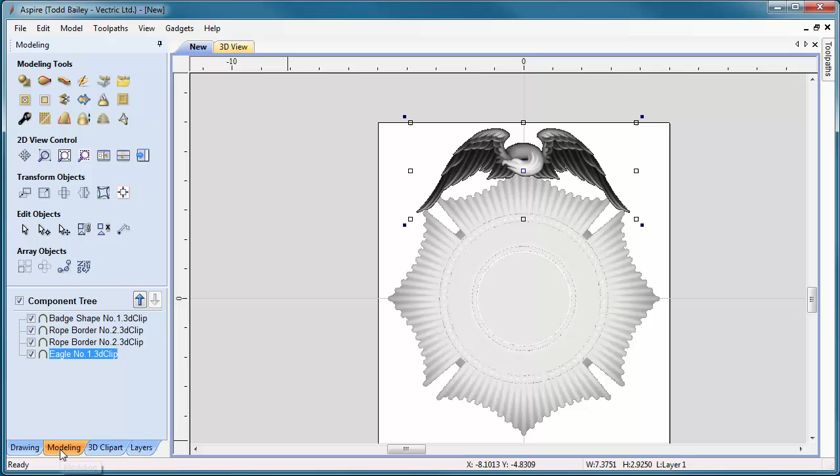So we're going to grab the badge and the eagle, and we're going to go ahead and make sure they're centered. Oh, they are, perfect. And that's great, so that's the layout, essentially.

Pretty quick, eh? But now what we're going to do is select everything and press F9, and then we're going to flip to the 3D view. Now we need to make sure that everything is being taken care of correctly.

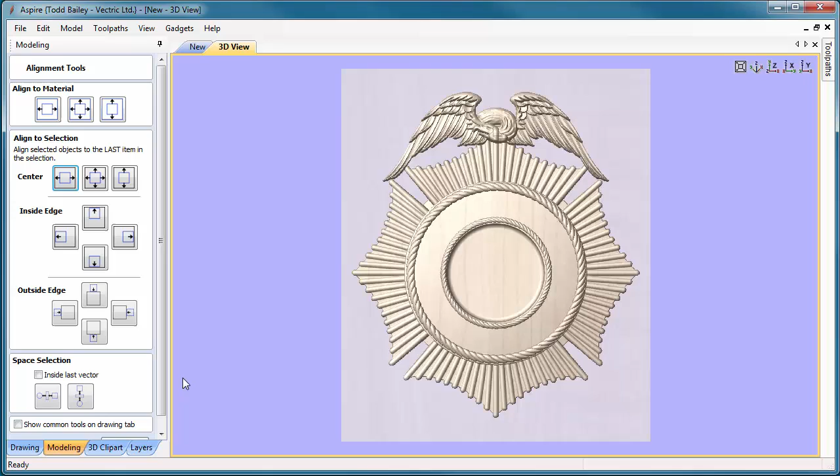And as you can see already, the eagle is being added to the badge, and that's not helping anything. So let's flip over, close down our tab here, and let's look at our component tree.

So we've got the badge shape, and the rope's being added to the badge, these 2 copies, and the eagle's being added. Well, we don't want the eagle added.

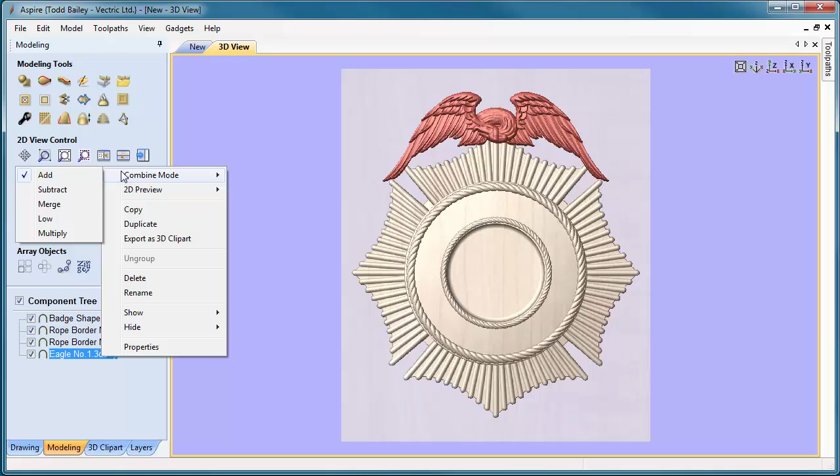We're going to need to right click on that, go up to combine mode, and we're going to go to merge. And now you'll see that the eagle is being merged in with the badge.

Now, our plan is going to be that we have a 1-inch thick board, so our layout needs to fit in half an inch of that. So we're going to start off with our

badge shape, and we're going to go up here to our properties, and we are going to make sure that it is less than the 1/2 inch, but we also have to take into consideration that our ropes are sitting proud of the badge. So let's make this 0.4, and we're not going to give it a base height.

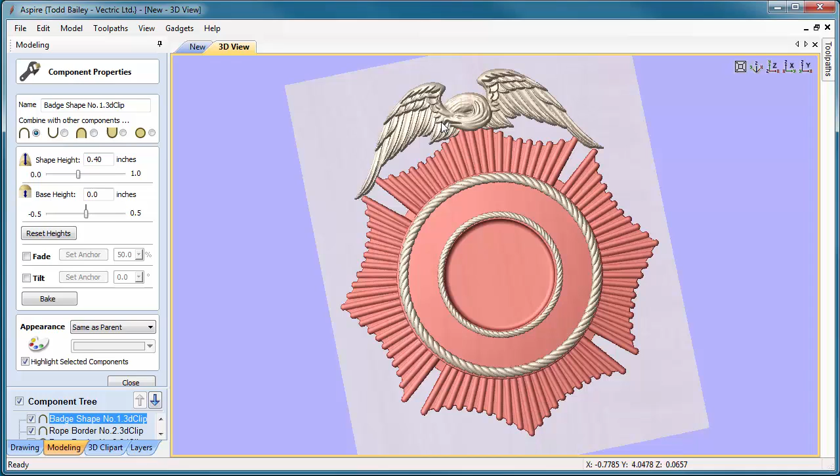Then we're going to go ahead over to our eagle here, double click on him, and we are going to make him 0.3. And we're going to give him a slight start height, or base height, excuse me, just to kind of get him up a bit higher. So 0.05.

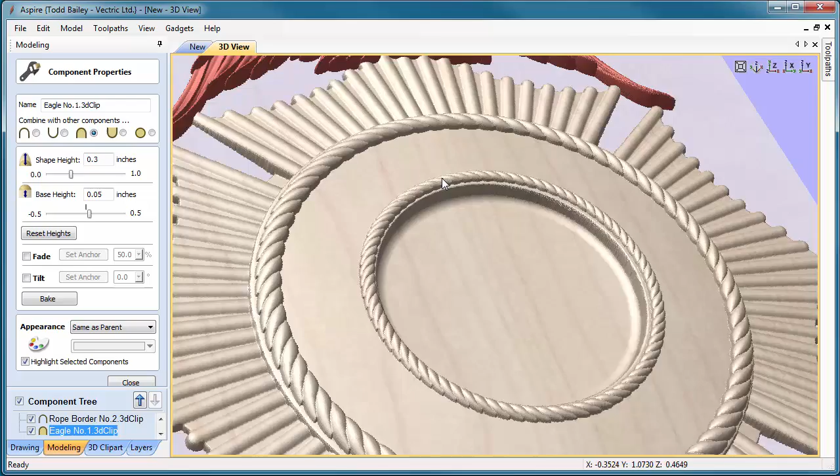And you'll see that just sets the eagle a little more proud of the badge, which is great. Now we're just going to go and take a look at our ropes. This rope here is 0.15 - we're using nice round numbers here just to make things easier. And this guy here, we're going to make him 0.075.

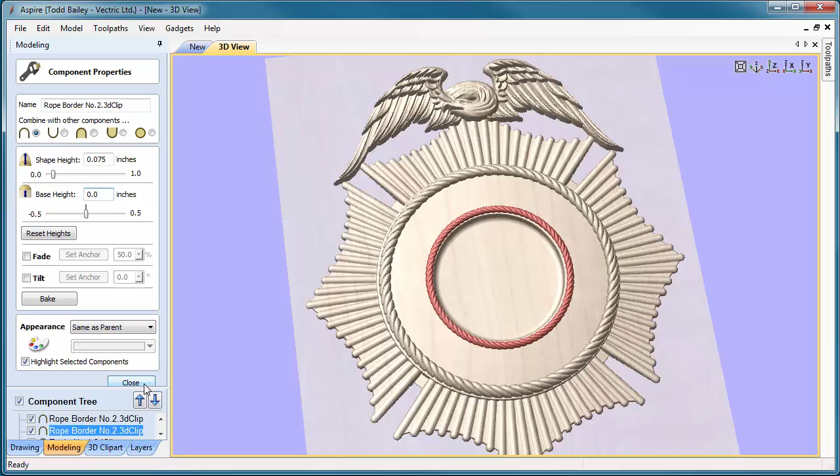And that should be good. Now if we close that down, we should be able to look at our model, and it looks perfect. All of that should fit into our half inch board. And off we go. Now if you want to make it a little fancier - oh, I see that my inside rope isn't quite centered on my model.

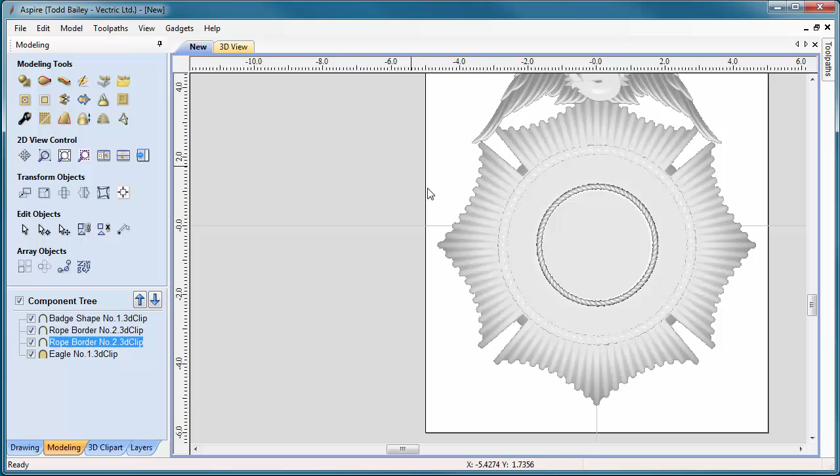So let's just go ahead and do that right now. Let's flip to our 2D page here, and we're going to grab the rope and then the badge, and we're going to center it left to right and then up and down. We're going to do the same with this rope and the badge as well, up and down, left to right, and that should fix it. There we go, perfect, okay.

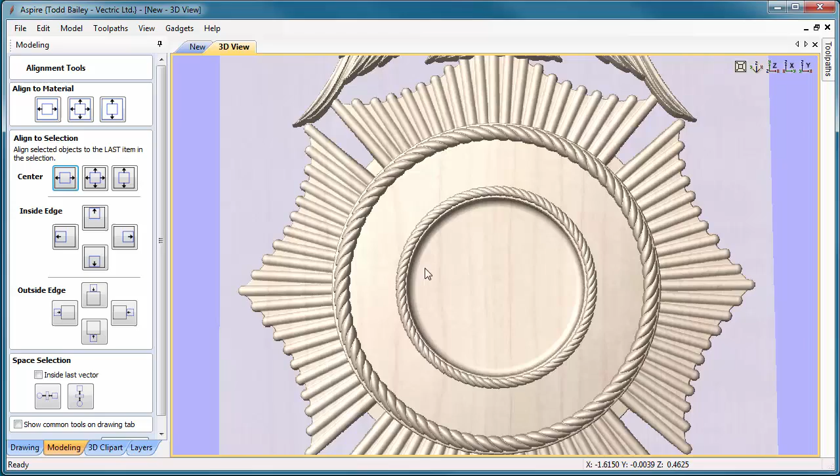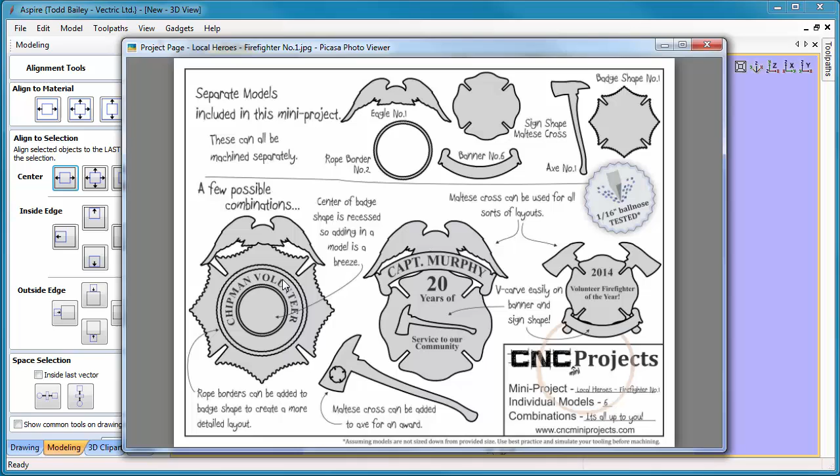And now we're going to fancy it up a little bit. If we take a look at our project sheet, you'll see that the center of this badge has been hollowed out a bit, so you can add in another piece of clip art if you'd like, or you can do some V-carving in there, and also you can V-carve on the rim here. So what we're going to do is flip back to our 3D clip art.

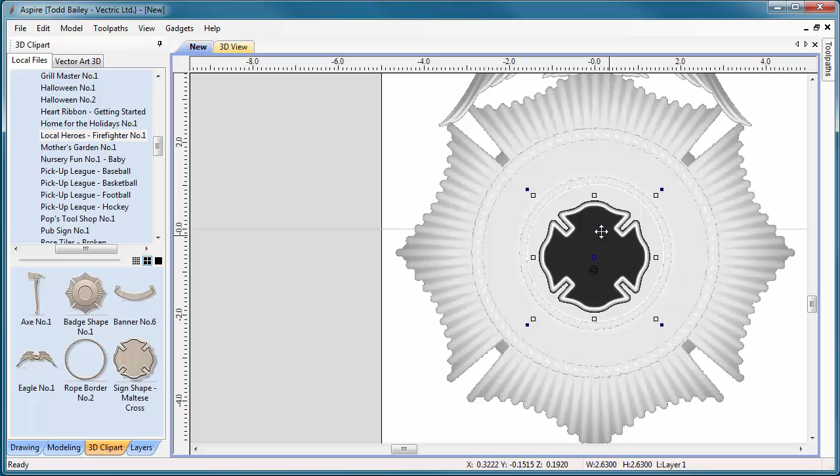We're going to bring in our sign shape, go to our 2D view, and instead of using the sign shape as a sign shape, we're going to use it as a little extra detail here. Just going to size them up to fit in that hole. Holding down the shift key, I'm going to select the sign shape and also the rope. So over to our modeling tab.

Because I didn't close down the alignment tool, it's still here for us. Now it's nicely centered in there. And if we close down that, you'll see that in our modeling tree, the sign shape is actually added to the model, which is great.

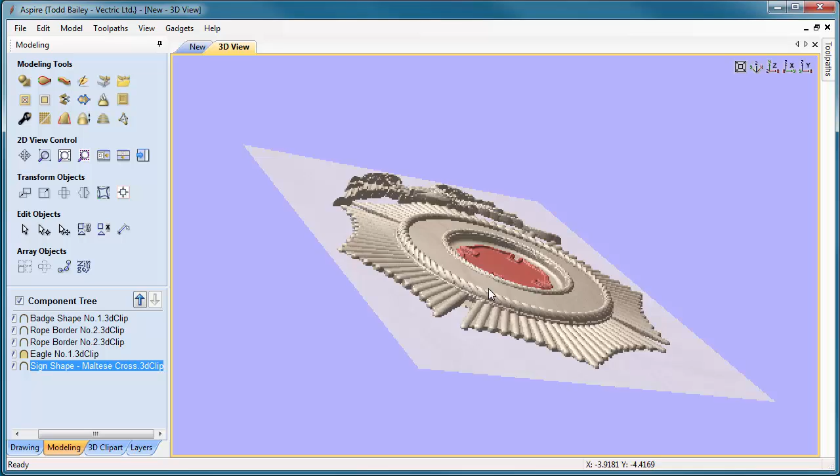So what we're going to do now is go to our properties. We're just going to make this 0.75, and we're going to add a bit of a base height to this, just to kind of pop it up a bit. And close. There you have it, that layout with the extra addition. Now you can lay out your text in the 2D view and do some V-carving there if you'd like, but that was pretty easy and painless to put together.

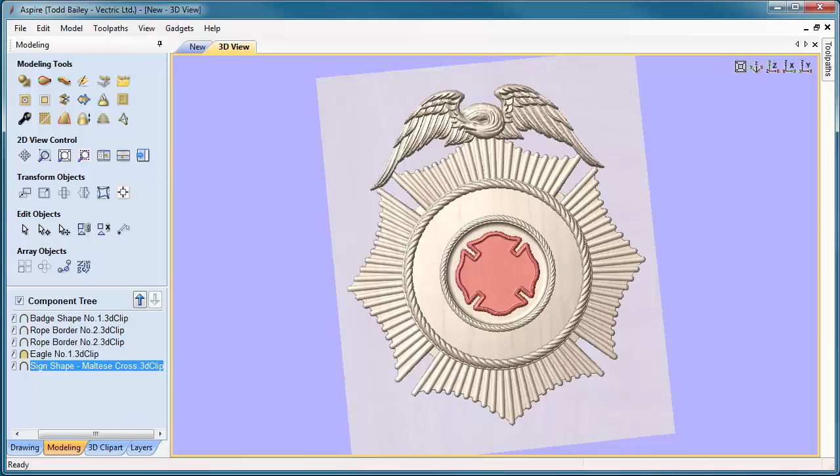Okay, using the same techniques that I just showed you in that quick video, you should be able to lay out any of these food for thought layouts here. These are all done exactly the same way, just adding a base height if you need to, and making sure that you have in your component tree everything merged in or added properly.

So for instance, with this particular one here, you've got the two axes that were merged together. The sign shape is merged on that with a base height that brings it up higher than the axe handles, and then of course the same with the ribbon - it's merged in with a base height added to it. And all of these are done exactly the same way.